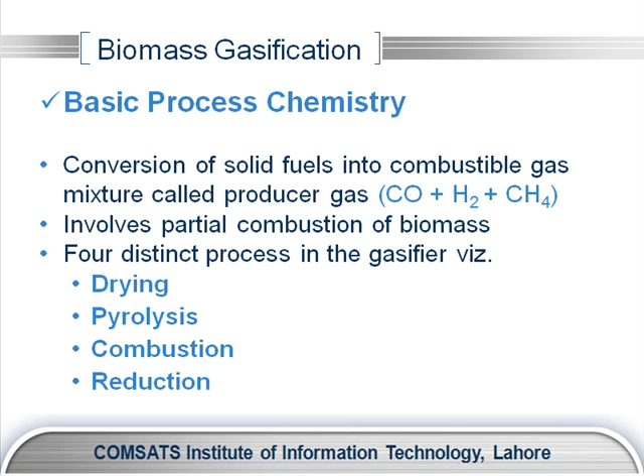In the gasifier, four processes are done: drying, pyrolysis, combustion and reduction. In drying, the evaporation of moisture is done for efficient burning of biomass. In pyrolysis, the long chain hydrocarbons are broken into light chain hydrocarbons. In the combustion, the burning of biomass takes place, and in the reduction, finally the gas is produced.

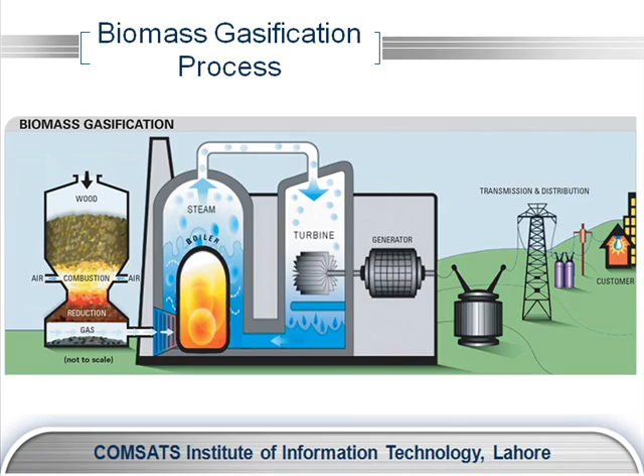This is a process flow diagram of the biomass gasification process to understand how biomass is converted into energy. In the figure on the very left, a gasifier is shown. From the gasifier, biomass is converted into gas, and that gas is used as a fuel in a boiler. From the boiler, steam is produced that drives the turbine and then the generator, and finally the electricity is produced and used by the consumer. Here is shown a biomass gasifier.

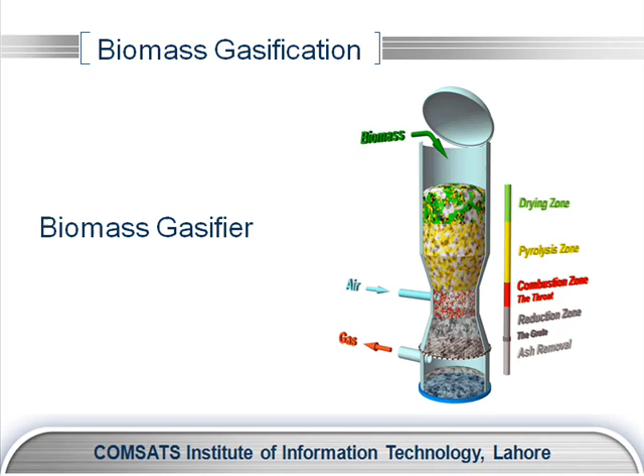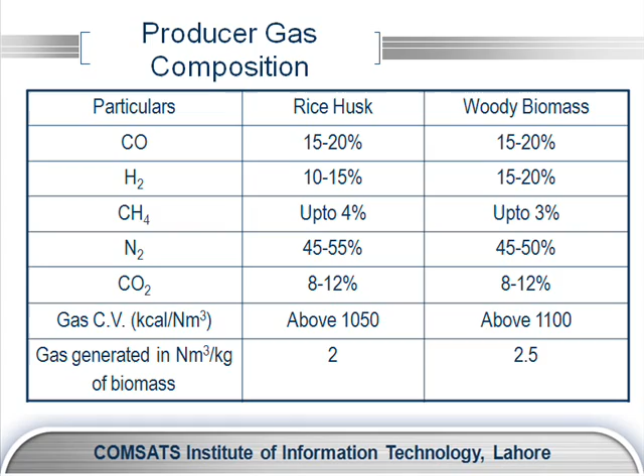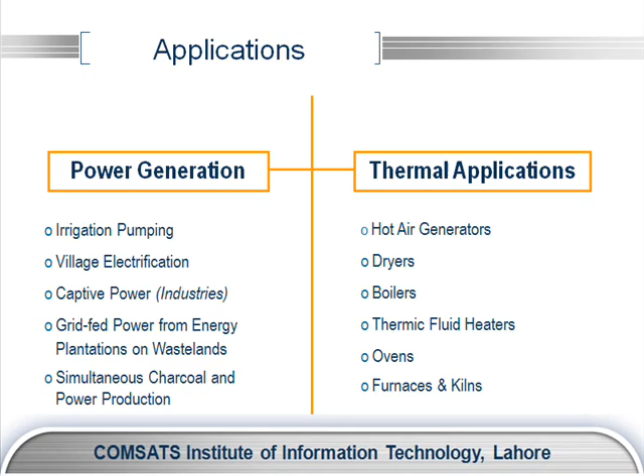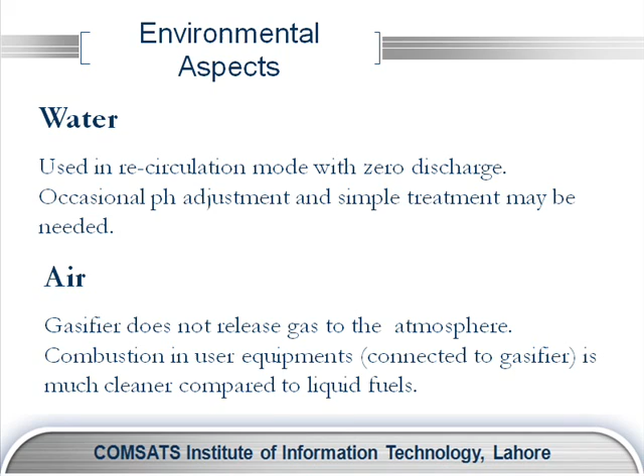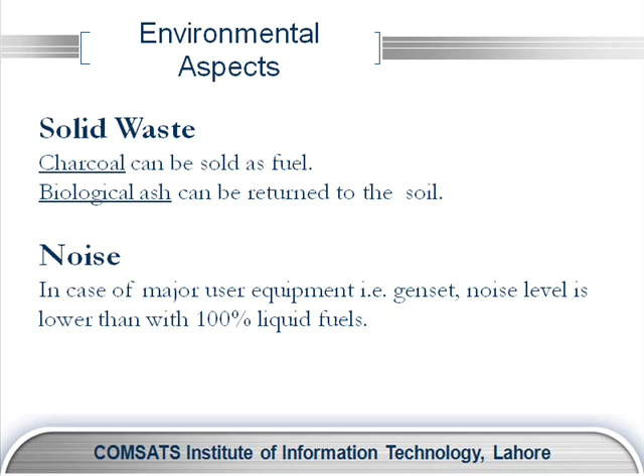The major environmental aspects of the biomass gasification process are water, air, noise and solid waste. Water is used in recirculation mode with zero discharge, occasionally used in pH adjustment or in simple treatment if required. Air is only used in the gasification process for the combustion of the biomass. In the category of solid waste, charcoal and biological ash are the waste of the biomass gasification unit. Charcoal can be further sold as a fuel, and the biological ash can be returned to the soil as it is not very harmful. And in the category of noise, the gas has much less noise than liquid fuels.

The alternate method for the production of energy from biomass is the production of biogas from biomass digestion using a biogas plant. In this process, mainly methane and CO2 are produced. Methane is odorless, colorless, has good calorific value and is a greenhouse gas. The raw materials of this process are animal manures, excreta, kitchen waste, industrial and chemical process waste, seaweed, etc. Animal manure and excreta contribute around 16% of the total global methane emission.

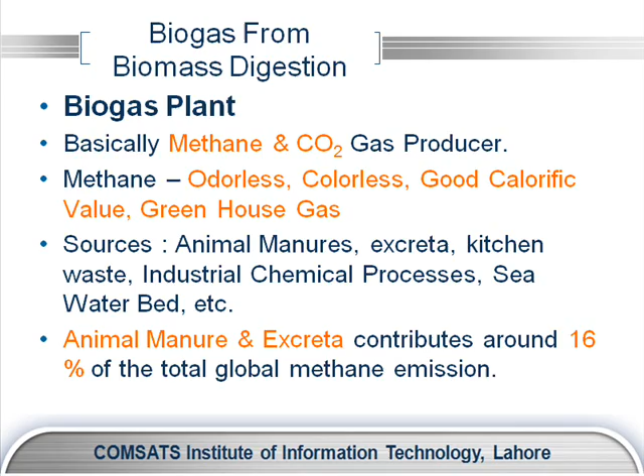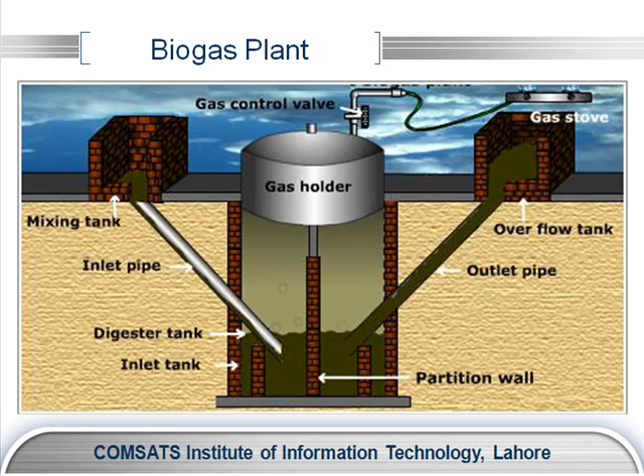The idea of biomass to energy has a lot of benefits. It contributes substantially to reducing global warming and is a cost-effective replacement for fossil fuels. This smoke-free gas emits less carbon dioxide compared to other fuels, a very efficient and environment-friendly solution for disposing of various organic matter. With the rapid increase in population and industry, energy needs are on the rise. Almost 7 million cubic meters of wood is used for commercial and domestic purposes annually in Pakistan.

Biogas energy generation systems are in demand and their number is increasing steadily. They are cheaper and can be run with very low operating cost. The bioenergy corridor can work as a good substitute for nearly 70% of the country's population residing in rural areas. At present, many agencies like PDDC, PCRET, and RSPN are working to disseminate renewable energy technology. But the need of a national policy is imperative to bring the technology to the farmer's doorstep and boost its success rate.